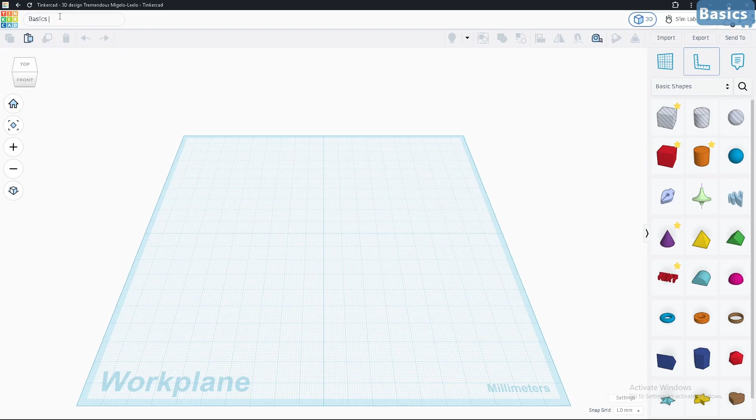Maybe not very useful, but we're going to learn a lot of different steps and settings here in Tinkercad. So I'm going to change the name first. I don't like the strange names they give us, so I'm going to say Basics Step 4, hit enter, and we're on a roll.

Now remember, this is your work plane. Everything that you design should fit on the work plane if you intend to export it. It depends on the 3D printer or laser cutter you're using to set the size.

If you want to change the size of your work plane, you can do that here. Click on the settings, you can change the background color. I'm gonna leave that back, I'm gonna put it at white. Actually, I like white. Do I need shadows? Do I need a grid on the work plane?

Now we're gonna cruise when adding new shapes. That's super helpful for putting things on faces or on top of other shapes. Here's the speed, you can play with that. I'm always using metric, and I really prefer 1:1 millimeters in default.

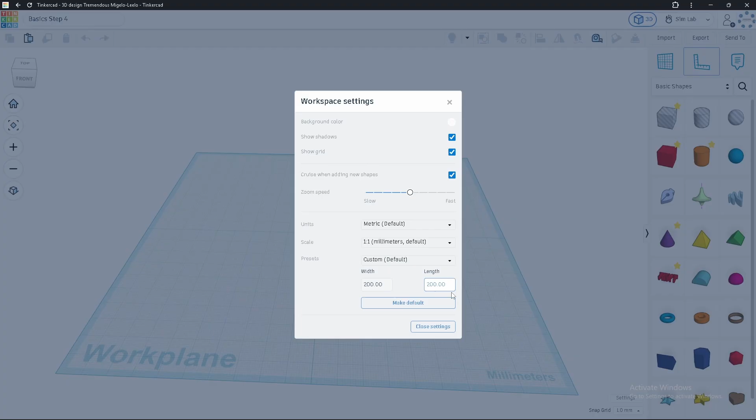For the size of my workspace, my work plane, I normally leave it at 200 by 200, even though I have some printers a lot bigger than that. But I don't always design for the full size of my 3D printers, so 200 by 200 is enough for me for today. If you want to change it, go ahead and do so.

All right, close settings. Now down here there's also what's called the snap grid. When you place a block or shape out here, when you're moving it from left to right or front to back, it's going to move exactly 1 millimeter, and each time it moves, it's going at 1 millimeter intervals.

If you want to change that, 5 millimeters or a quarter of a millimeter, 0.1 millimeters. If you want really good detail, go ahead and change it to 0.1, and you get the tiniest little bit of movement for the snap. I often find myself having to change it to 0.25 when I'm trying to make things align just right.

So if it's not aligning for you, this is where you need to go. You can even turn it off and you'll have perfect alignment every time, but it's gonna be a bit sensitive sometimes. Normally 0.25 works for me every single time, I've never had to turn it off or use 0.1. But anyway, you might find yourself in that position. That's where your settings are.

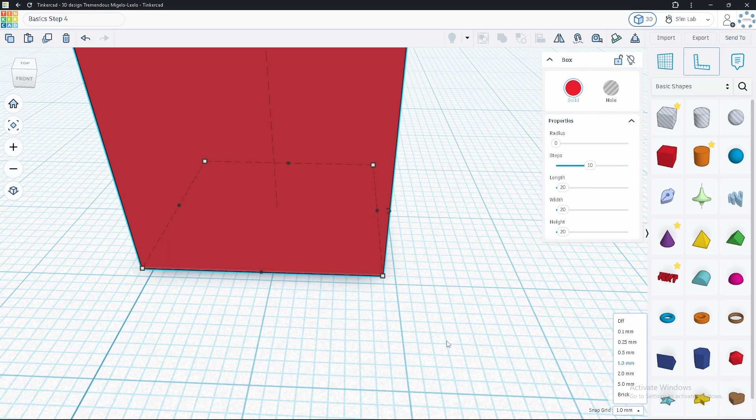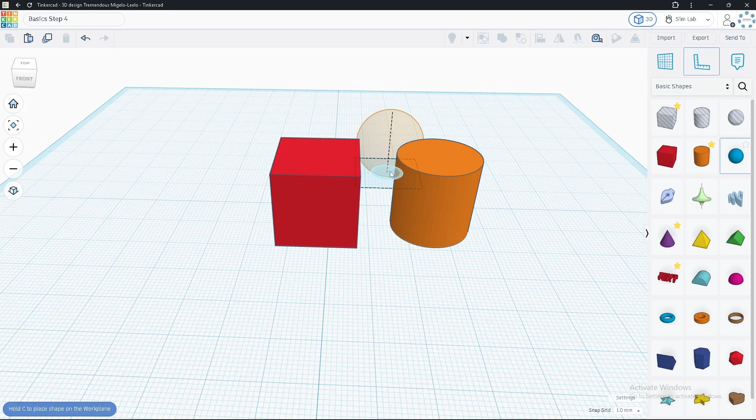Now, when we're using Tinkercad, if you want a shape from the shapes library, you can click and drag it, or you can click it, and this is what's called the cruise. It's cruising now, notice I'm just moving my mouse, I'm not holding the mouse button. I clicked once on the shape and now it's just following my mouse around, doing what's called the cruise.

So I'm going to stick that right there on the top. Don't know why yet, but that's where it's going to go. How about we make a little fidget toy? We can use these 3 shapes that we've got here and make a little joystick type of fidget toy, right? So I'm going to resize this block.

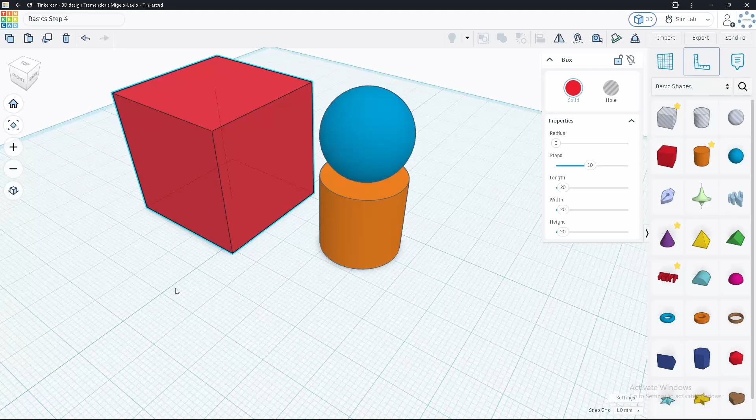Now I'm going to hold shift when I do it. Hold shift down, and I'm going to pull on one of these white handles, and I can get my block to resize all the way around. Now I want this to be a square, so I'm going to check 33 by 33. How tall is it? 33. It's a perfect cube. Great, all right, that'll work for me.

Now take this cylinder and let's zoom it up a little bit. I gotta increase the size of this sphere. All right, and now I want these to be lined up perfectly, which they are not.

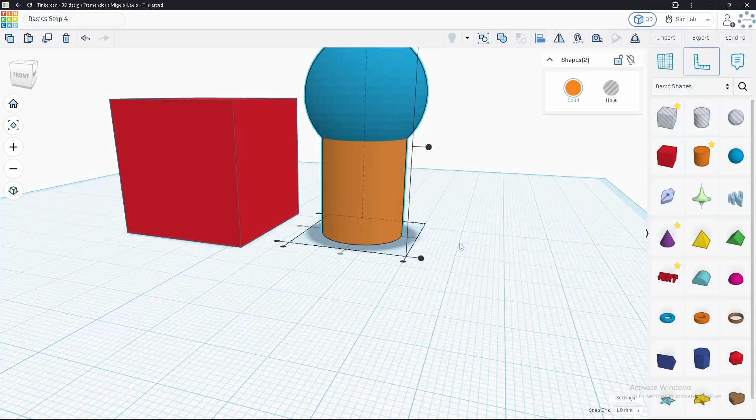So I'm gonna click in the white space, click away from my shapes, and drag a selection pane around those 2 shapes, and I'm gonna use the align tool. I want center and center, and I don't want the vertical alignment to move at all. So there it is, perfect.

All right, now we're gonna make a little joystick fidget toy. So what we're gonna do, I think we can make it smaller, I think that'll work out for us. And now I want this to be one piece, but I'm thinking I might make it a little bit taller.

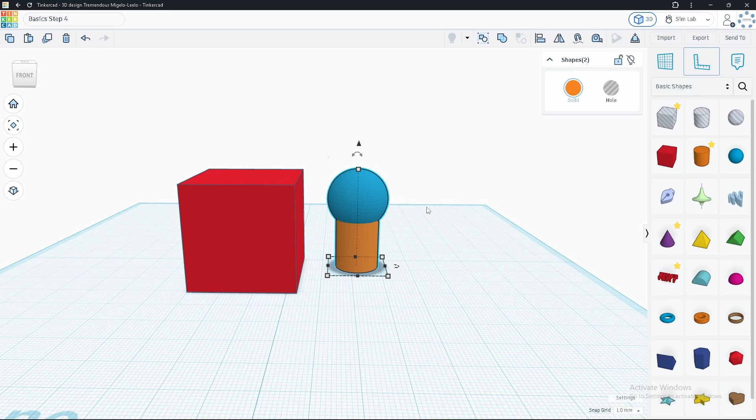So let's go ahead and move this ball up. Use the cone at the top, the sphere, and I'm going to stretch this cylinder up. Notice the top of that cylinder is up inside the sphere. I want that. I want to make sure these two shapes are really combined together.

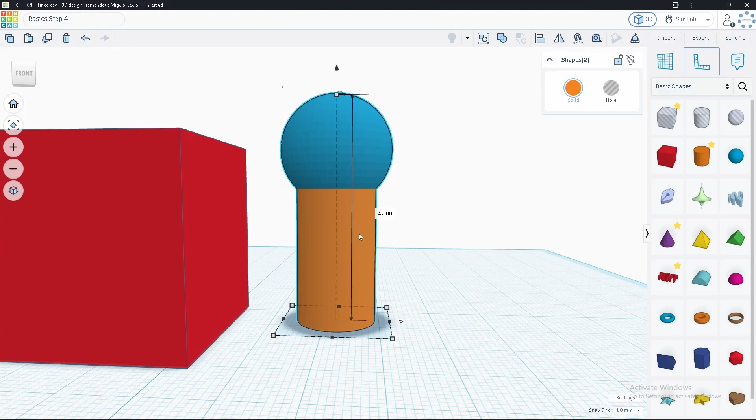All right, now select these two. Let's group them, so I'm only working with one shape. And I'm going to change the color just because the orange color doesn't really work for me all the time.

Okay, so we're going to stick this inside of here. We're going to copy and paste. We're going to make it a hole, and then we're going to cut away the hole and move this back inside. I know you didn't follow that, but watch what happens, all right?

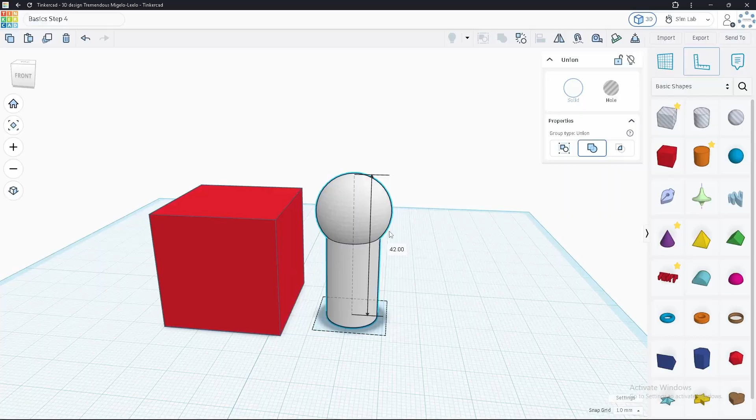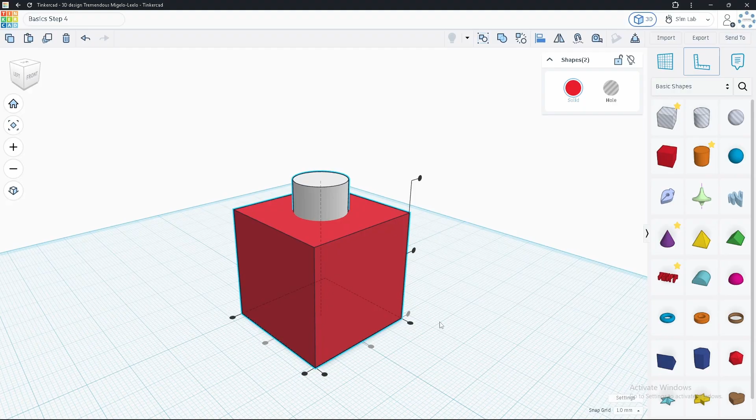So what we're going to do first, turn it around — I'm holding shift while I do that. And now I want to put this right in the center, so I'm going to select both of those shapes and use the align tool again. And I accidentally clicked away from that. There it is, all right? It is exactly centered right at the moment, okay?

All right, let's go ahead, pull this up just until I can see the sphere. All right, that's the bottom, well, the top now, top of the sphere, okay?

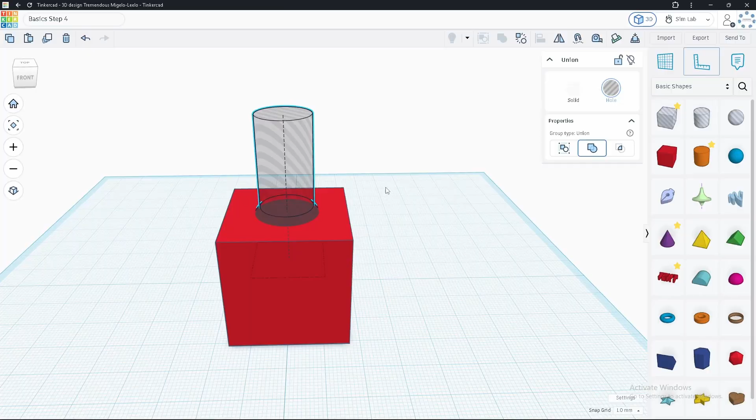All right, what I want to do is make this a hole. I'm going to cut that out of this cube here. But before I do that, I'm going to copy and paste, Control C, Control V. All right, here it goes. But before I do that even, let's change the radius on this particular cube.

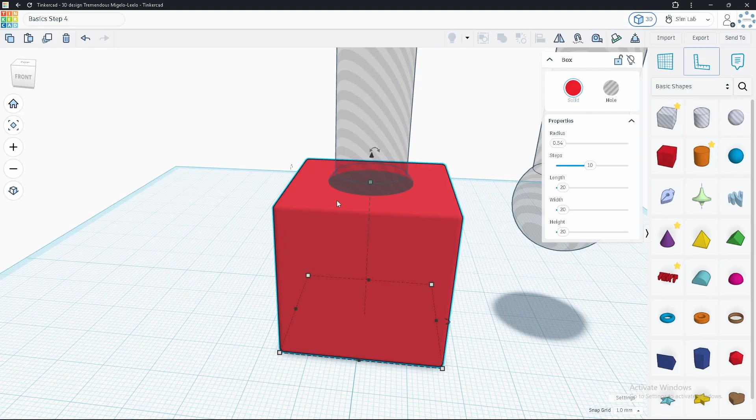Now, remember I said this is going to be a fidget toy. I don't like those very sharp corners on my fidget toys, so I'm going to change the radius a little bit, not a lot. What is it at? 0.5? That's fine, and notice I have rounded corners now. That's going to feel better on my fingers — it won't hurt my hands when I use it. So I'll be able to hold it, grab it, really give it a good squeeze, and it won't be sharp and hurt my hands, okay?

Now you can go ahead and do that as much as you want. You might have to give the bottom supports if you're 3D printing it, but no big deal. All right, so now we're at 2.3 — 2.0, 2.07, something like that. That's fine, whatever.

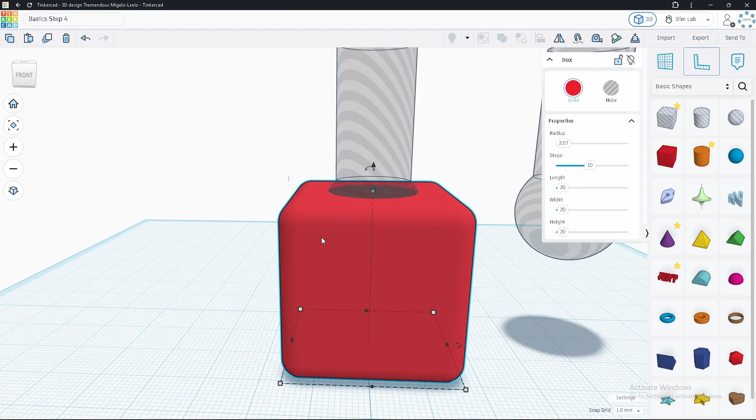Okay, now what we're going to do is cut the hole away from this cube. So let's go ahead and select both of those shapes and use the union group. And there it is — I have that hole just right.

Now, why did we make a copy of that? Well, that is going to be our joystick. We're going to shrink this and stick it back in there. We'll probably have to raise it up a little bit so that it doesn't get stuck.

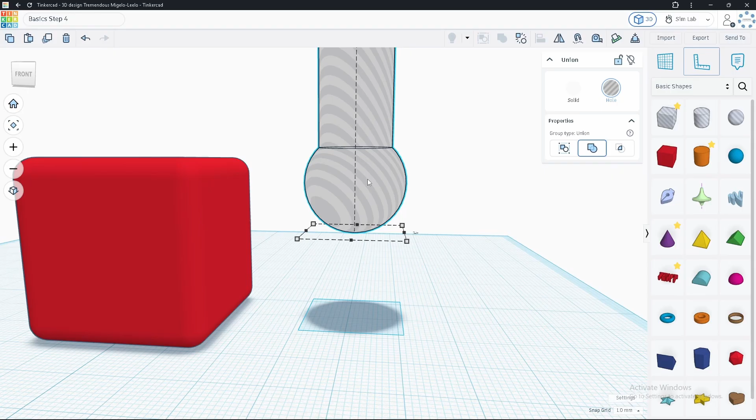All right, so let's go ahead and turn our hole back into a solid. Got it. And now, holding shift, I'm going to try and — you know what, it'll probably be easier if I just type. I'm going to give it 2 millimeters smaller. And there we go. And now the height, 42, 2 millimeters smaller is 40.

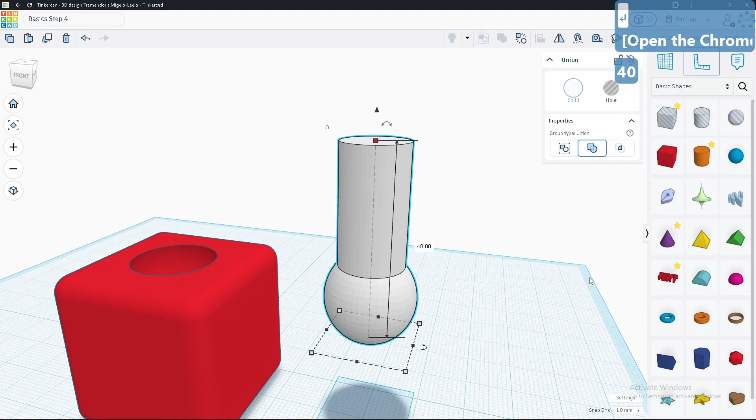All right, and now let's go ahead and center these. So I select both of them, use the align tool, center, center, done. All right, let's check what it looks like.

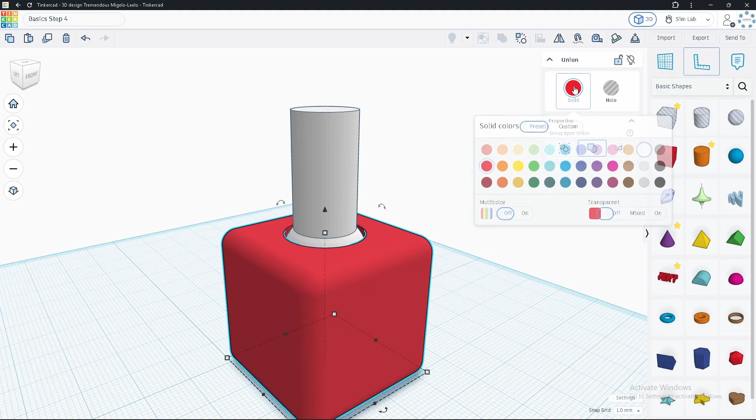We're going to have to look inside. What that means is I'm going to click this red cube, click the color, and change it to transparent. And would you look at that — it is stuck down at the bottom. This is not going to be free to move around at all.

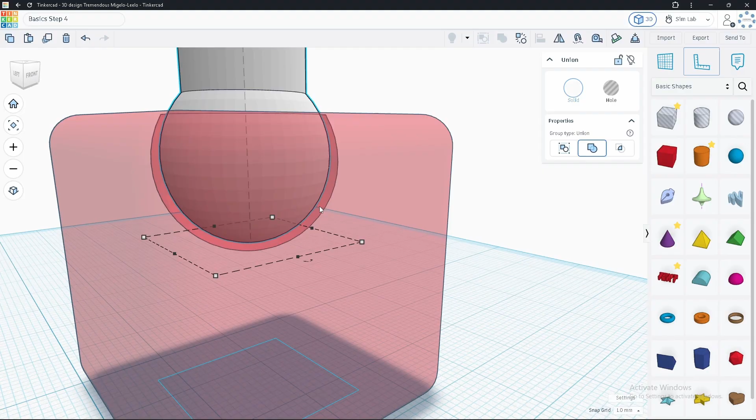So let's go ahead and click the cone and raise it up. Now, notice we've got a gap all the way around there. So what's going to happen is when I print this, it's going to be free to move, and it's going to be like a little joystick, and I can move it around left, right, forward, and back.

Now, depending on the tolerances of your 3D printing setup that you got going on, you might be able to make this gap smaller or possibly have to make it larger — it depends on what you can confidently print. This has to be printed in place. The reason being is the sphere is bigger than the hole at the top, so it can't come out. It's locked in there, and that's what we wanted. I like that about it.

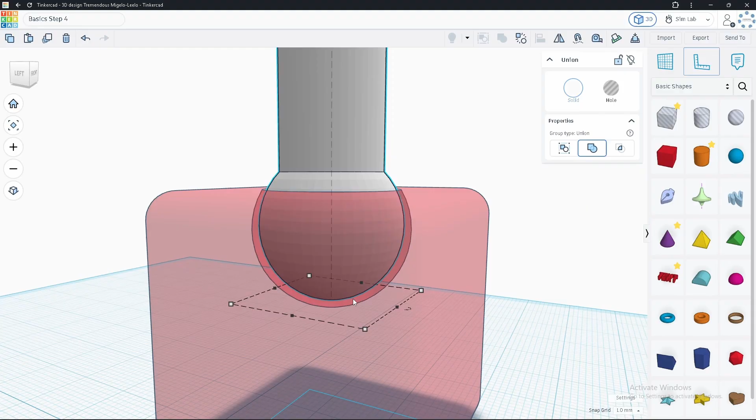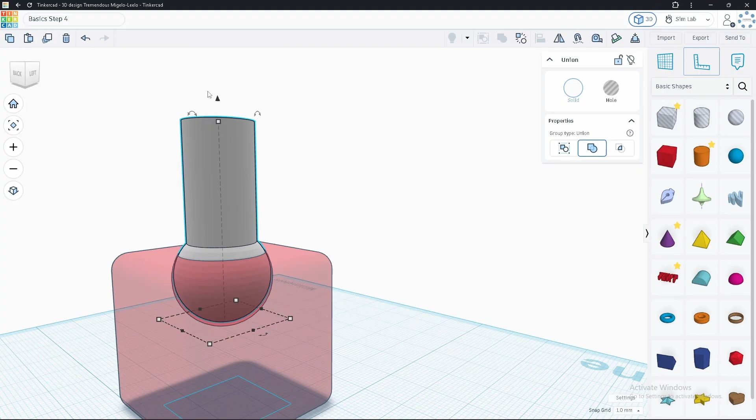All right, so then we'll go ahead and center this one more time using the align tool. I try not to fight with the tools and shapes and center them manually. I like to just use the align tool and be done with it. It's three clicks.

All right, now look at this. This is exactly what we were talking about at the beginning of the video when I mentioned the bottom down here, snap grid. Watch what happens, see, it's stuck at the bottom. When I click the cone and raise it up, now it's too close to the edge up here. It's not even all the way around. So one millimeter snap is too much.

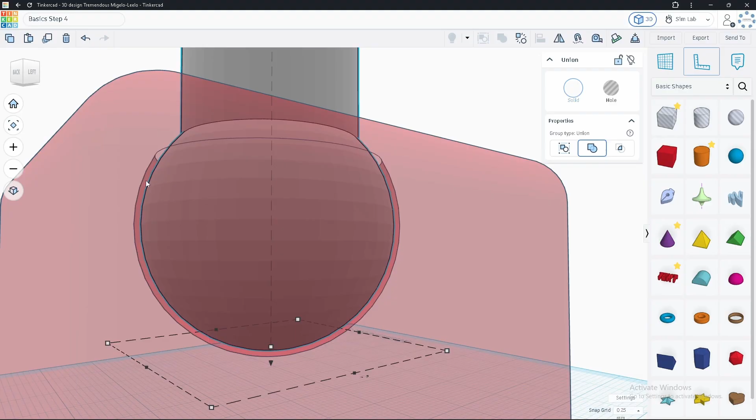I don't want a full millimeter, so I'm going to change it to 0.25, and let's go down a little bit. That looks really close. Ah, now that looks perfect. Remember what I said about 0.25? It seems to always work for me. Now notice the top gap all the way around the side, down to the bottom and all the way back around is even.

It's the perfect sized gap all the way around. All right, looks good. Now, when the 3D printer prints this, it's going to be a little fuzzy at the bottom, but we won't notice it.

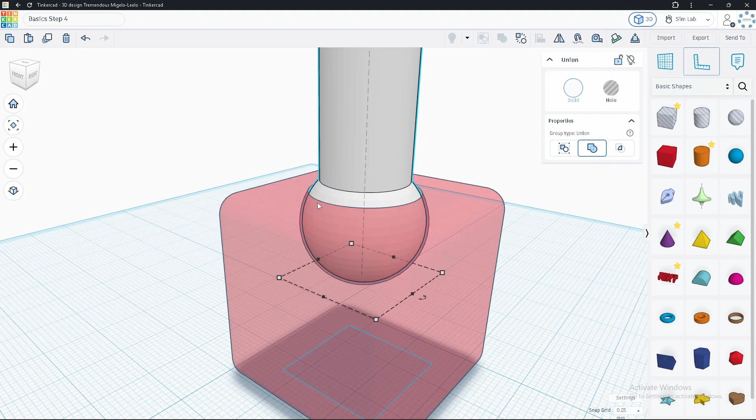So when you first pull this out of your printer, it's gonna be stuck a little bit, and you just kind of wiggle it loose and then play with it for a little while, and by the end of the day, it's gonna be super free and perfectly fun to play with, right? And that is your interlocking fidget toy.

So could we make it cooler than that? Of course. Now there's no reason that you can't put your name in here and stuff like that. Let's put my initials on here.

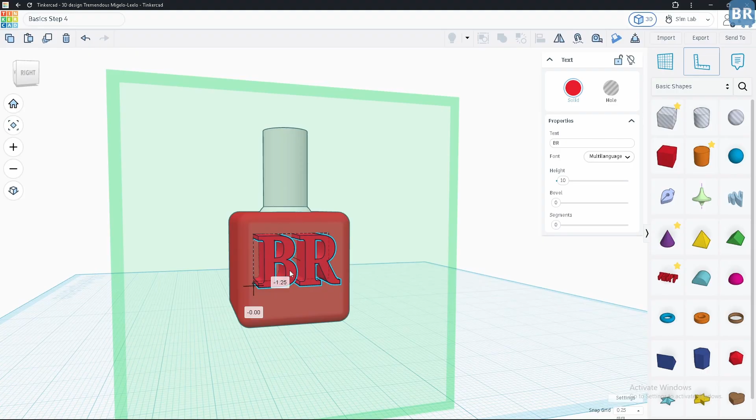Is my name Bob Ross? I don't think so, but I'm just gonna put BR. I don't know why. Let's go ahead and smash this in using the cone, and then let's change our letters to a hole.

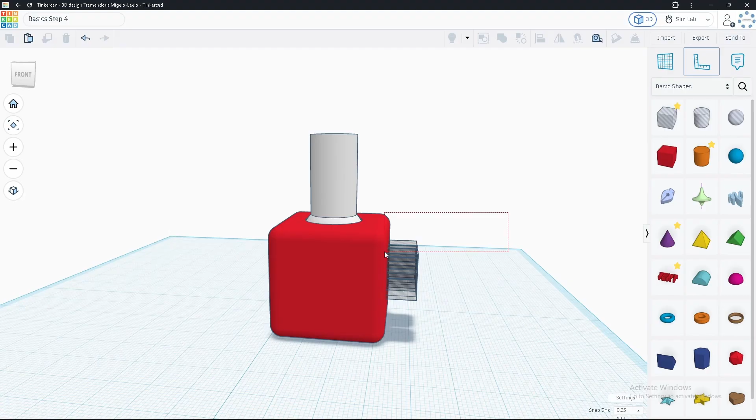All right, select both of those shapes. Now notice when I select things, I don't have to go and make a big giant circle or square all the way around. I just want to touch my hole and my solid together with the selection pane. So you just click somewhere, boop, and I'm touching those two shapes. Those two shapes are selected, and when I use the union group, I will cut the BR out of my new toy. There it is.

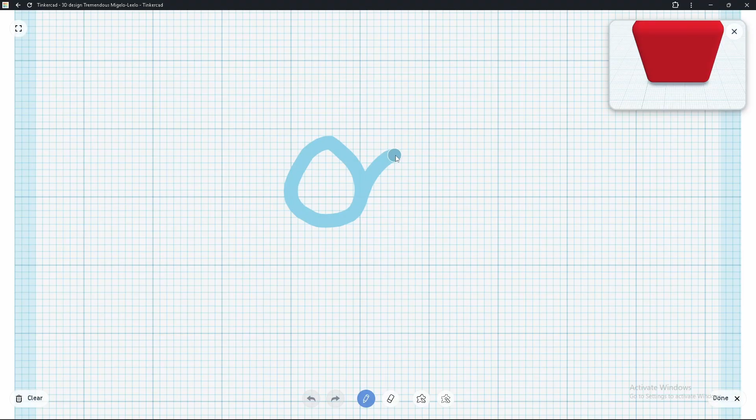Over here, maybe I want to make another little design. Let's make, here we go, this is my self-portrait, and I'm doing this with the scribble tool. Now this looks just like me.

You don't know it, do you? But it does. Whee! Stick your tongue out. Ha! Should we give them some freckles? Here we go. And click done when you're done.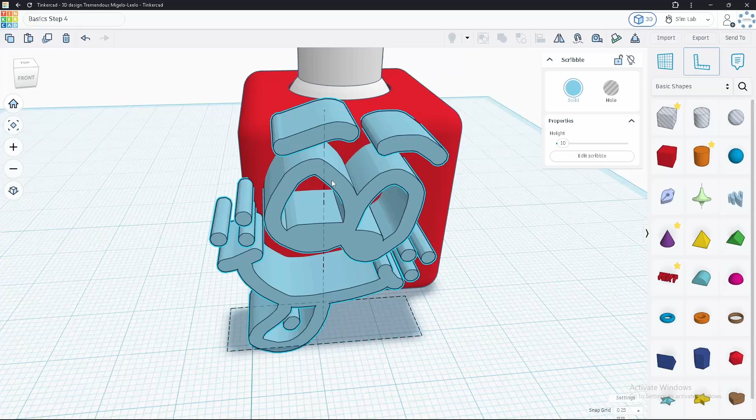Alright, it's a bit too big. Don't worry, we can resize it. There it is. Let's squish it down. Raise it up. Squish it down. Yeah, that's alright. Now we gotta put it into our shape.

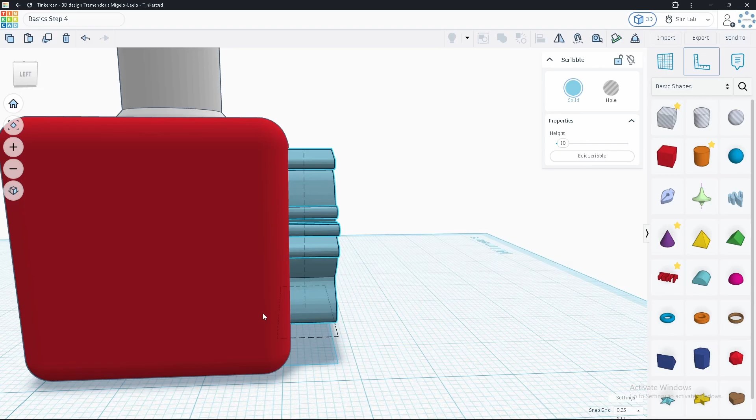So we're gonna make it longer this way. Now let's check, notice that it's right here. I don't think it's gonna interfere with the stuff inside, but I don't want to risk it, so I'm gonna go ahead and make it a little bit less inside there. Alright, okay, make it a hole.

Pew. Select those two shapes, Group, and look at that, we've got a cool little cutout. That's so cool. So it's got a picture of me, it's got my initials.

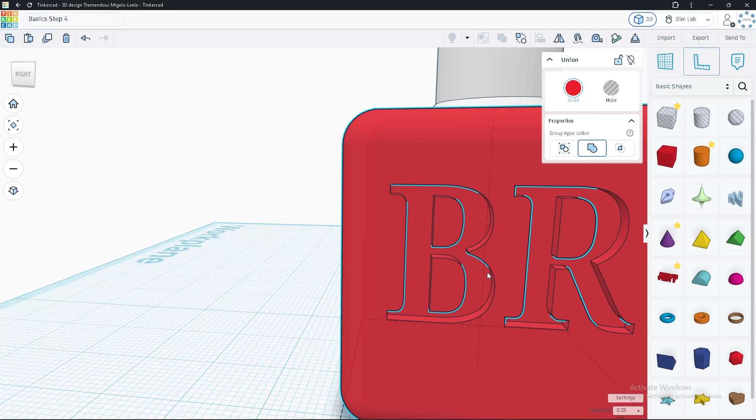What goes over here, that's up to you guys. For me, I'm gonna put a star in there.

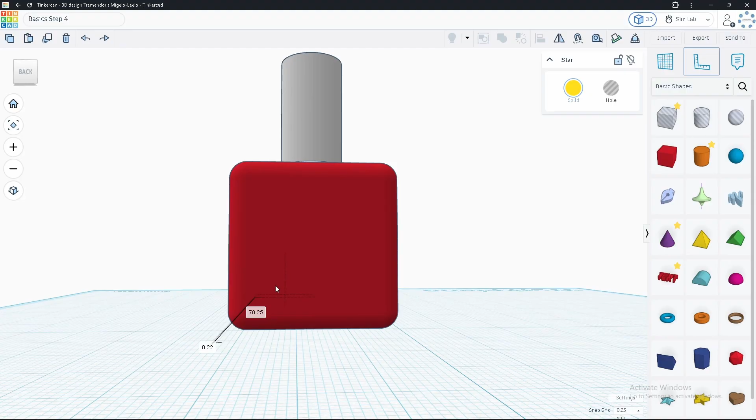Now if you do something crazy like that, don't keep clicking. I just clicked the wrong thing, so I'm gonna click over here, undo, boop, and I'm back to where I started. Okay, don't get scared. I'm gonna hit control, undo again. I messed it up again.

Alright, so I'm gonna raise it up and weep. Now it's a little bit too tall. Alright, there we go. Now stretch it to the right, squeeze it to the left.

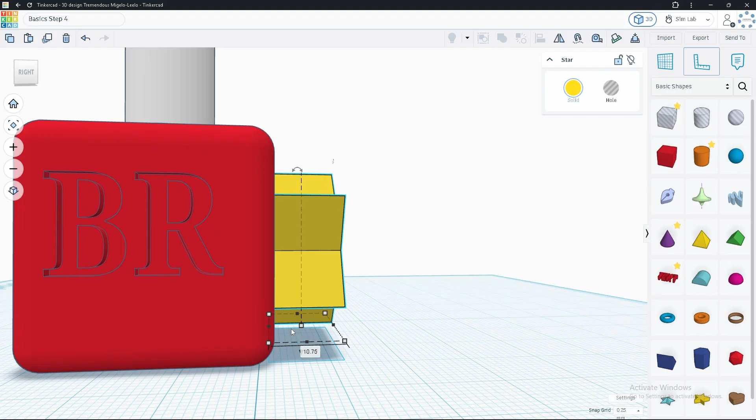We're gonna make sure it's inside of our shape. Look, it is not, see the edge of it? It's right on our shape, but it's not in our shape. So we gotta push it in a little bit. Make it a hole. And guess what? Select the two shapes, Group, and cut that away.

There's my star. Pretty cool. Alright, we've got one more side to do. What should we do over here?

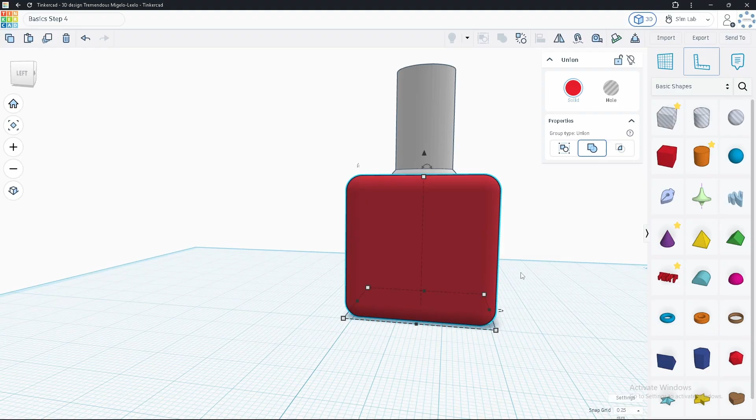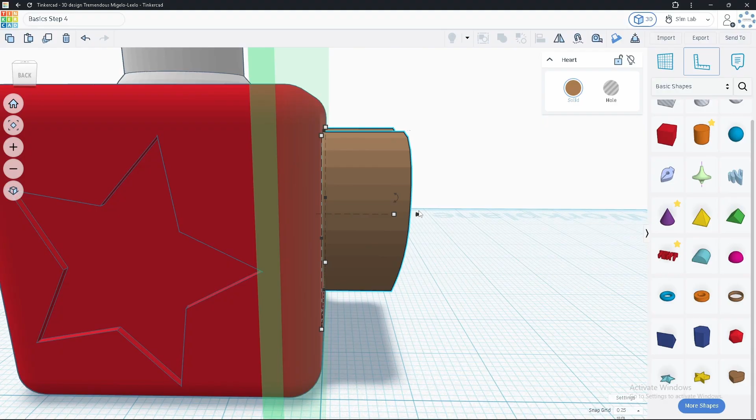We've got other shapes. How about a heart? Squeeze that down a little bit, raise it up. Now make sure it's inside of our shape, which is, it is not. It's on the shape, but not in the shape. So push it in. Now it's in 1 millimeter. You want it a little more? There it is, about 2 millimeters, 1.75. Okay, turn our heart into a hole.

And select those two shapes, Group, and there it is. We've got a heart.

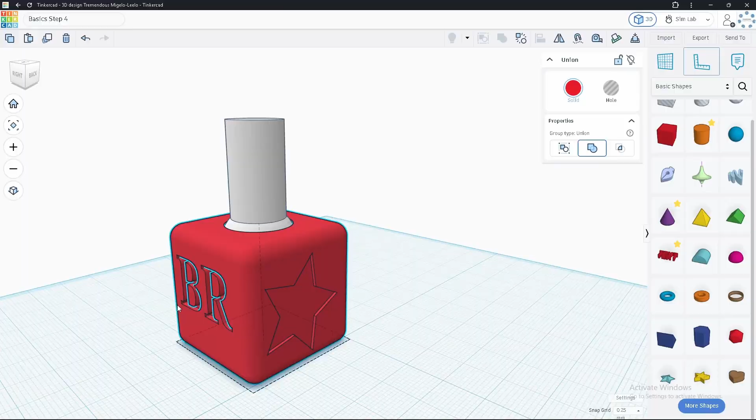Alright, nice. Now, I talked about the edges of our cube being nice and round and easy to touch, but what about the top of our joystick handle? Look how sharp it is. We could do something like this. We could put this dome on the top. That would work, right?

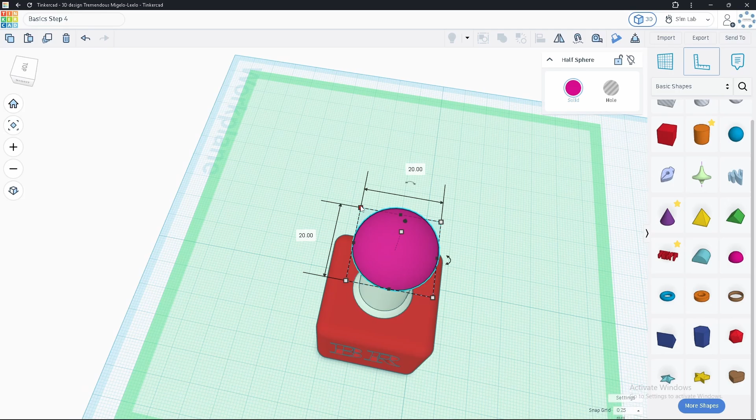So let's see. Let's try to make it the same size. I don't know how big this thing is. We could have measured before, but this won't take very long. There we go, it's something like that.

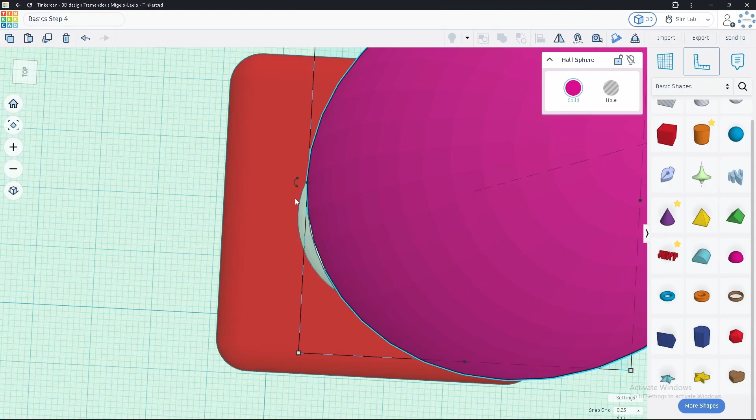Let's zoom in a little bit so we get it right to the edge here, and go onto this side. Now I'm using my right mouse button, and I'm clicking the center click. The center click is the scroll wheel. I like to click that while I'm working, it really helps a lot.

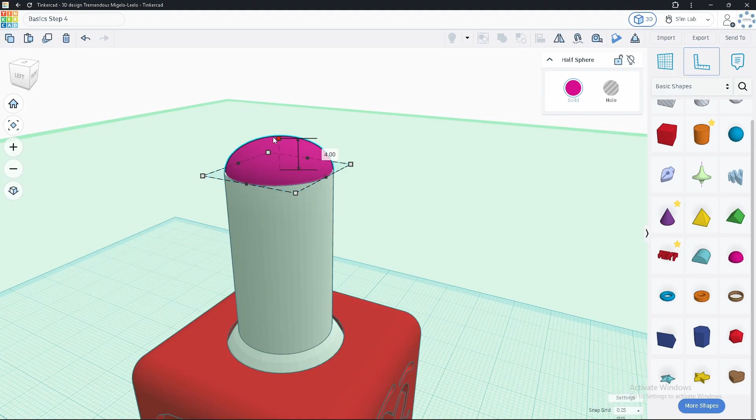Alright, we're almost there. I think that's got it right there. Looks pretty good, except it's huge. Let's see here, could be a little bigger here. Could be a little bit bigger there. Let's check this side. That looks pretty good.

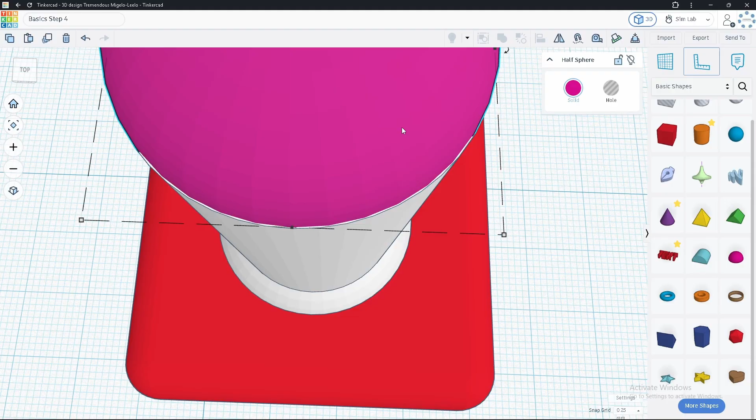Now, there's something about this shape that we might be able to change. And no, we don't have any sliders that we can change for the half sphere. I wanted to make it a little bit smoother, but there's nothing we can edit, so that'll have to do. Looks alright for me.

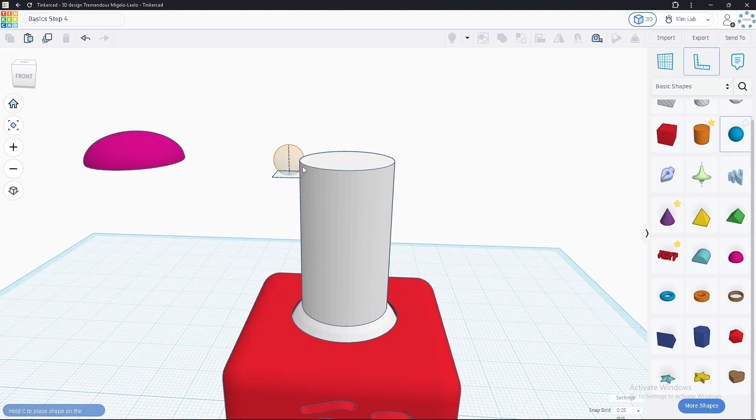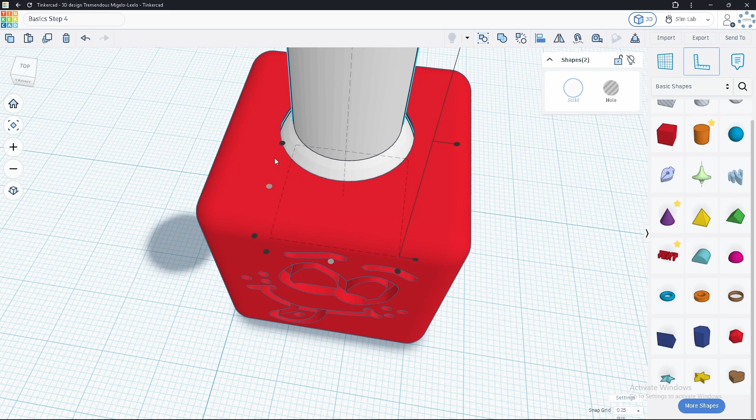Now, if you don't like that top, don't worry, you can put this sphere on the top. Go ahead and smash it down inside. You want to resize it maybe? And then put it down a tiny bit. Then let's select those two shapes, use our align tool, center and center. And there you have it, there's a sphere.

And I'll go down a little bit more. There. Seems that the sphere fits onto there a little bit better. So let's delete this, just click it and click delete. Alright, now there is our fidget toy.

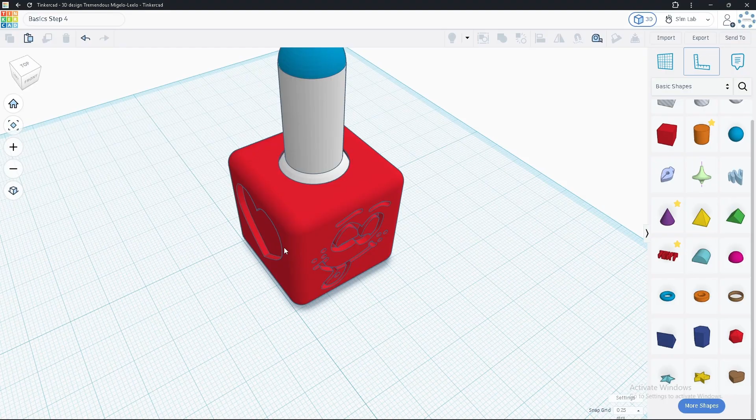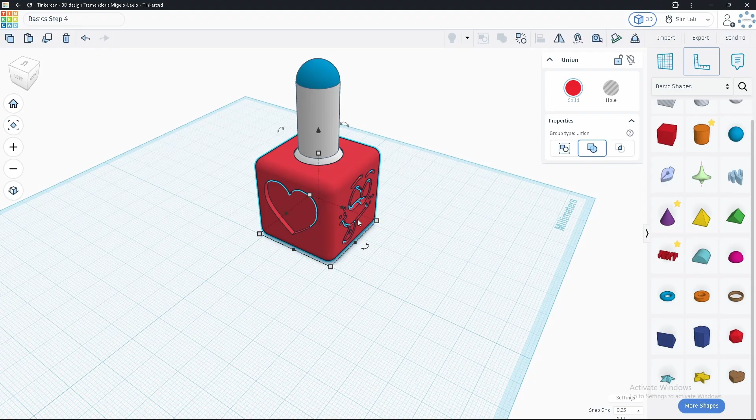Using the skills that we've used today, you can pretty much make whatever it is that you want. These are the basic skills, right? Copy and paste, we used the handles to resize, we typed the size in some cases, we used the align tool a lot, we used the group. Using those particular skills, if you're creative at all, you can make really cool stuff.

So these are just the basics for today, like how to rearrange things, how to cut holes, how to make something that's fun. Now this fidget toy, I have made a bunch of these, and people have asked me, can you make me another one? I want to give it to my friend, or I want to give it to my mom and dad. They're very popular and very fun to play with.

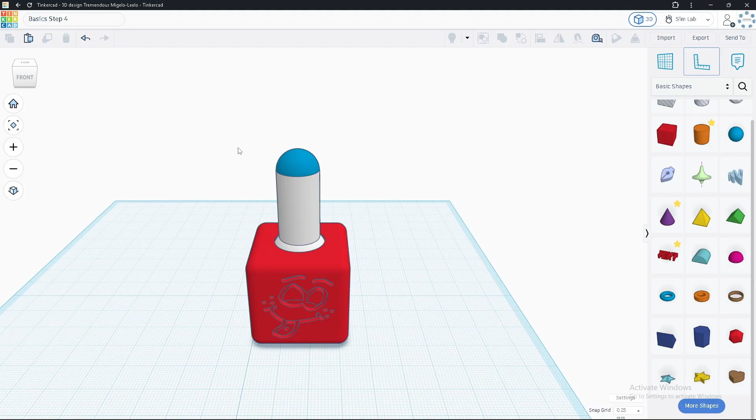Now what's cool about this is holding shift, you can make these really small and you can 3D print a bunch of them, like one little finger size. All you have to do is copy and paste, select both of those, then copy and paste those. Don't do that, just like that.

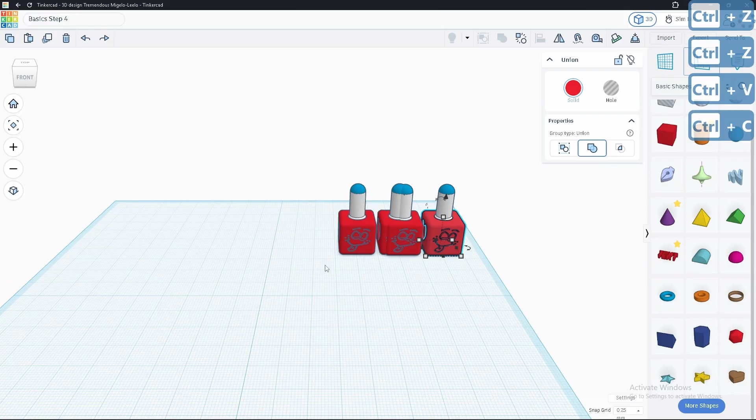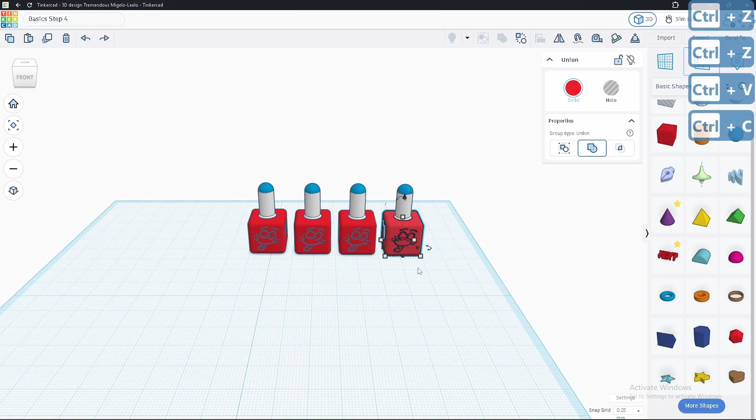Oopsie, I'm gonna hit Control Z. Let's try that again. Copy, paste. Now there we go. Remember, when you mess something up, don't start clicking and trying to fix it, just click undo and then start again. Copy, paste, and here we go. So yeah, I did it again. Select everything, copy and paste, and here we are.

There's 8 of them. I can print those all out right away and give them to my friends, just like that. If you want these bigger, well, make them bigger. Hold shift. There they are.

Now when you print these, you can use 5% infill. 15 is fine, but you don't even need that much. 5% works just fine. Give it 2 or 3 exterior walls and it'll be perfect, it'll be great.